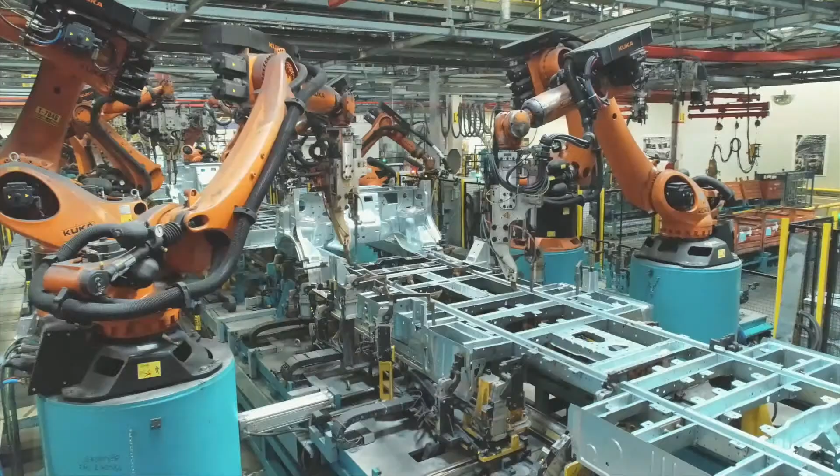I was the first director of the MSc in Sustainable Energy Futures. Energy at the time was very important. It was already obvious that we needed to work on sustainability, and it was clear that one of the missing links were people capable of viewing energy as a system and understanding enough of the links between the various components to be effective.

There was no training, there was no program available, so we decided, well, let's do it our own. Let's do something which is highly distinctive, a bit imaginative, and will put us at the forefront of the field. There was then very strong support by the college in enabling us to do an experiment, essentially, which required completely different organization, and so they said, okay, let's try it because it's worthwhile. We have very strong support, and I will be forever grateful for letting us try to poke the system and do something highly innovative.

Sustainable Energy Futures is a master's program which really empowers students to learn skills in energy and deploy those skills. The MSc is a great course because it brings together people from all around the world who are passionate about solving today's energy problems. We are going through a once-in-a-lifetime transition towards renewable energy, zero carbon systems, and this is a very complex issue requiring multidisciplinary knowledge.

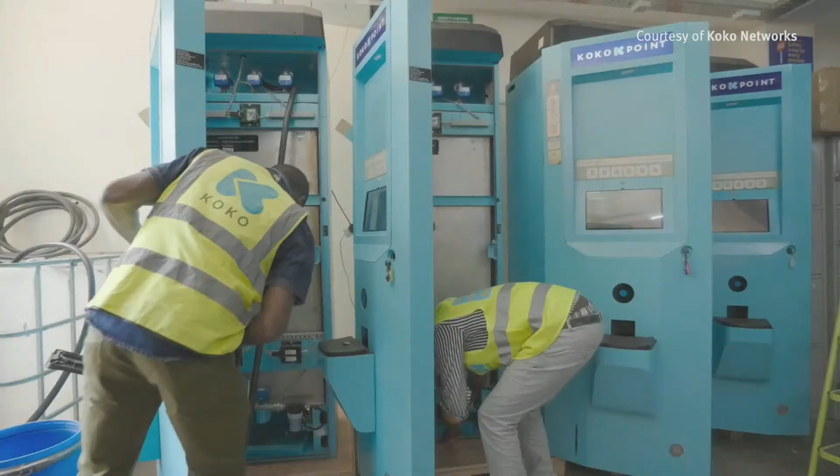So I co-founded a company called Koko Networks 8 years ago, which is mainstreaming ethanol as a cooking solution and household energy solution in homes in sub-Saharan Africa. The Sustainable Energy Futures Masters was extremely helpful in evaluating and making that choice, from the perspective of really understanding where the biggest areas of impact would be. So still in energy, as you can see, and I think SEF definitely helped me to get there.

First, let's face it, it's a well-known degree, and so that's very useful to get a job in energy somewhere else, like I did. I worked in Canada, the UK, France, and the US, and it was very helpful.

The 4 years that I spent directing the Energy Futures Masters were without doubt the 4 most rewarding years of the 18 years that I spent at the college.

The reason for that was quite simply the fantastic group of students that I got to work with during that time. What really stands out for me about the course is just how it brings out the best in everyone. The students come there because they have a mission in life, they really want to make an impact.

The staff really like teaching the material because they deeply care about the subject. We've done this for 15 years now, hopefully another 15 years at least. There's a lot left to do in energy system decarbonisation.

We started out by looking at low carbon electricity systems. The debate has clearly moved on. It's about decarbonising across industry and transport and buildings. That's upped the challenge in all of the technology areas that we educate in, and means this course is still vitally important. I think we're very proud, and I'm very proud to have been associated with this programme. I think it's been a really important programme. I think it will go from strength to strength.

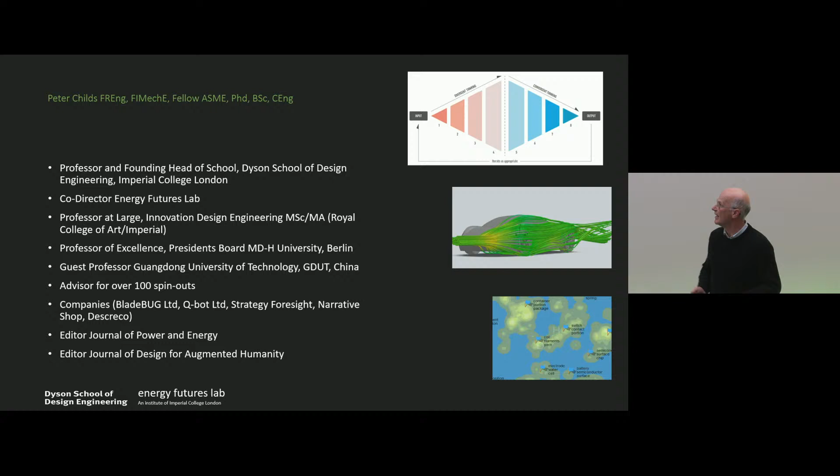So the Energy Futures Lab, we recognise that at Imperial, silos are good for getting those in-depth skills. Ladies and gentlemen at the back, we have 30 seats right at the front, and I really don't mind if you walk down and come join us at the front, so please do if you wish.

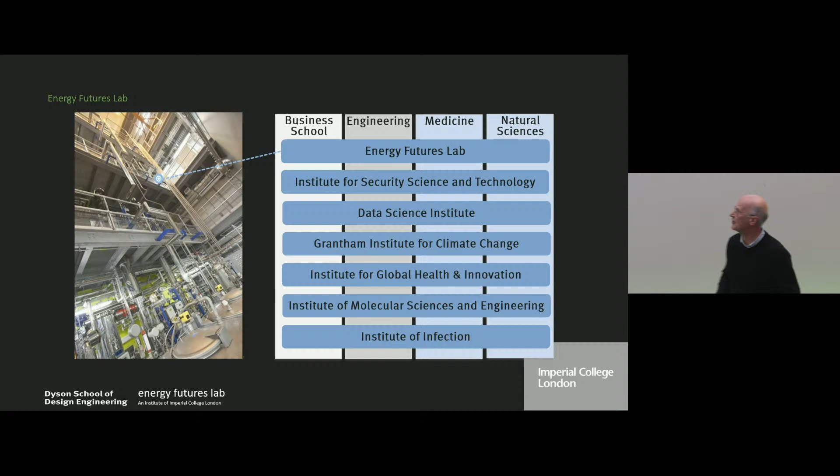What are we looking at in the Energy Futures Lab? Well, it is extremely broad, from materials to policy to power generating units to the materials we use.

I love the focus on materials here at Imperial because it's so easy to come up with concepts, and I've been party to this. We developed technology for chemical looping combustion, but it's only when one of my colleagues did the calculation on how much nickel was required for the pipework that we realised there wasn't enough nickel in the Earth's crust to do the technologies that we were proposing. So a very sensible approach to materials is vital.

Which of the chemical engineers in the room don't use iridium in their catalytic approach for something? And you know, there are finite quantities of some of these key materials. So we need to be wise and cautious in this.

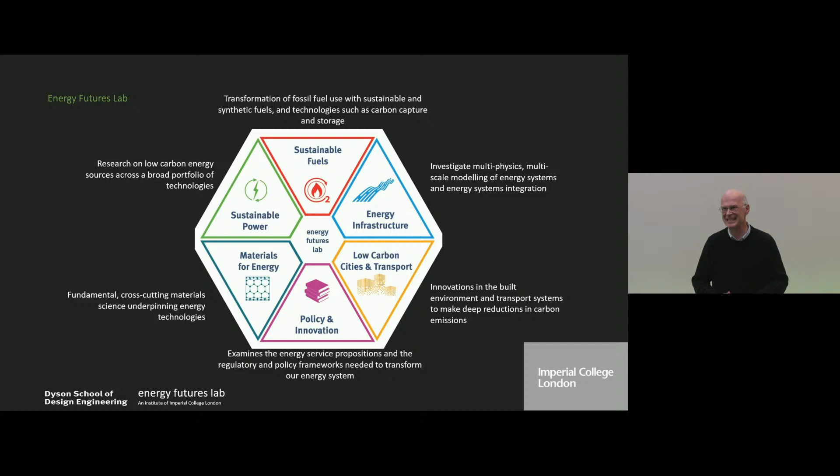So you can see the breadth of activities, and indeed the Energy Futures Lab represents about 600 researchers here at Imperial. And then, of course, we collaborate around the world as well. So it is a great delight to be involved in this activity.

So, technologies. I said I would give you a go. I don't know whether you're all used to menti.com, but you can see people grabbing for their phones. If you have a smartphone, go to menti.com, and you'll be asked for a code, which is 8650491. Whether you're in the room or seeing this on live stream, go to that link, and we would like you to answer this question: what technology do you regard as relevant to the UK energy context for a sustainable future?

If you're uncomfortable about it being UK limited, go wider. Really don't mind, so just enter whatever comes to your mind or you think is sensible. Nobody's saying it's not working. This is positive so far.

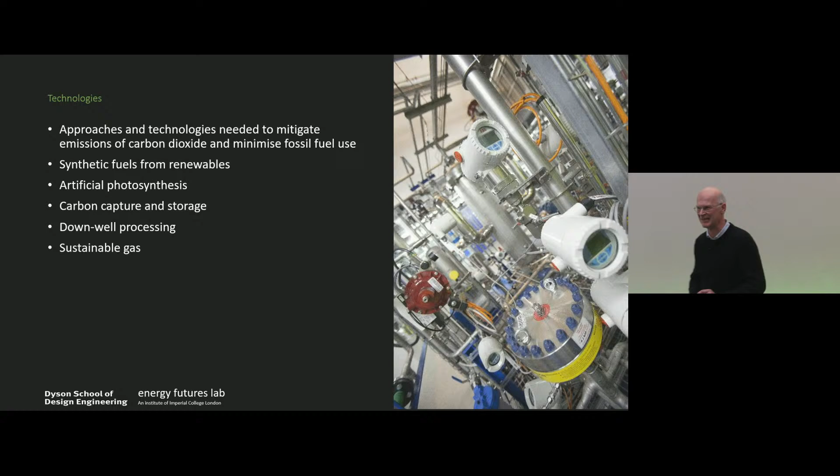You will see topics here which are not always comfortable to be debated. Downwell processing, sustainable gas. Say in the UK, should we turn our gas supplies off tomorrow? 11 million homes and buildings would not be able to have heating. So we need sensible approaches in order to go forward. And I look forward to questions about that statement, perhaps in 20 minutes or so.

I've already telegraphed that I'm engaged with wind power, and there are alternatives to use of petrochemicals. My ready solution is I'd love us to build 70,000 additional wind turbines around the coast of the United Kingdom. I'm being blocked. I've been trying to push forward 5 new wind farms, maybe 15 new wind farms in the English Channel. We only have one.

There are all sorts of politicians who run away from me when I get near them because they say they want sustainable power, but when it comes to one near their constituency, perhaps their view is a bit different. 70,000 wind turbines, we could actually do this. It is not implausible. It would create some challenges.

Tim will be wincing. How are we going to cope with that when it's not windy for 2 months of the year? August, nightmare for wind because it's a bit of a quiet, non-windy month. And we have had periods of 6 weeks in Europe where there has been very little wind. So you need additional technologies. Bring them on.

And perhaps if you're not going to go wind and nuclear, perhaps you're going to go wind and stored hydrogen. So there are options ahead of us.

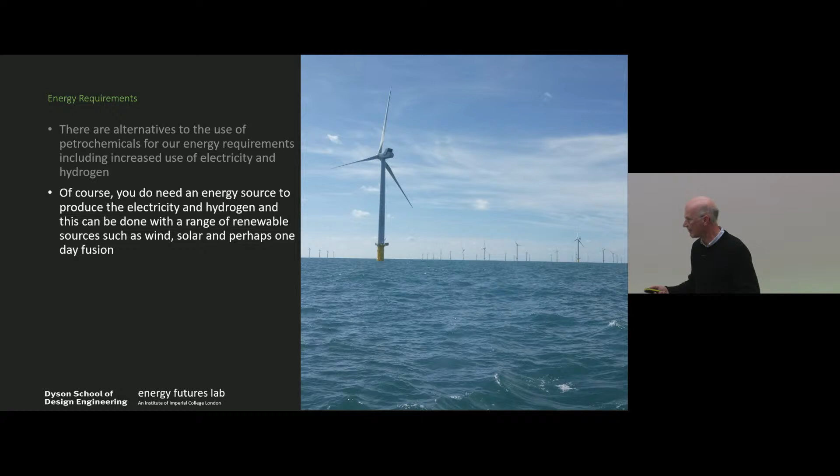But this technology is great. We have shallow waters around the UK, so building offshore wind turbines is comparatively easy in comparison to other countries. That's one of the reasons why we've gone ahead. But there are consequences. There's a lot of work on wind. You can't just innocently put up wind turbines.

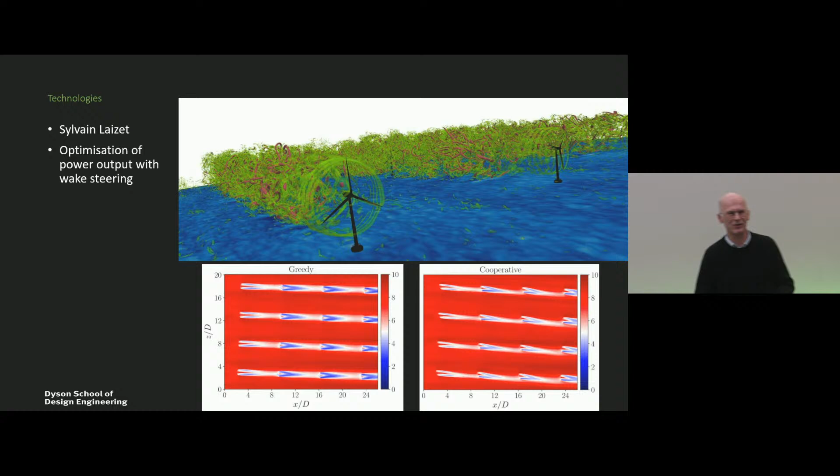And Sylvain Laizet's work on wind turbine placement, optimizing their positions so that you get the most in-changeable conditions - it's vital work, and you can get that extra few percent out of your wind farm. And you'll see why that's important in a moment.

Putting up a wind turbine, we've been doing this for a long time. And quite a lot of people in operations and maintenance will say, well, the designers did great jobs on designing efficient equipment, but no consideration was put into how they're going to keep that equipment going, how they're going to maintain it and repair it, and give it lifespans of tens of years.

We have a lot of remote service vessel technology. This is just cool kit. If you're into your gadgets, this is just wonderful stuff. But this is the enabling technology we need in order to install this equipment and then keep it running, and keep it running at scale.

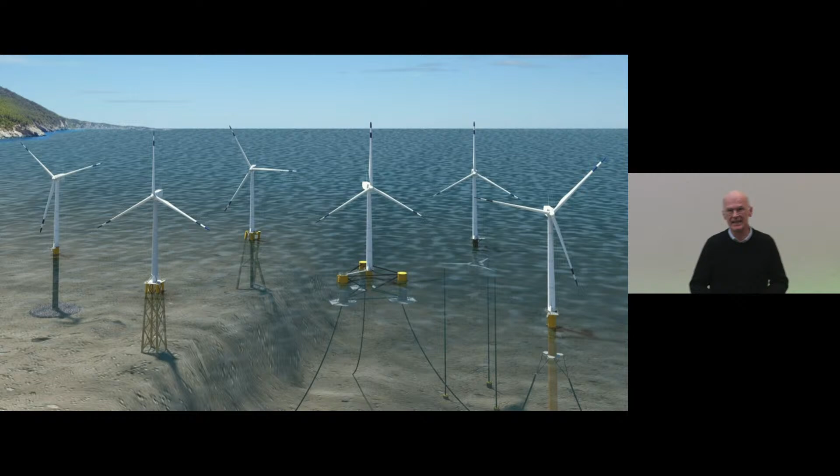Whilst places like the North Sea may just be 20 to 60 meters deep, and it's quite convenient to install wind turbines, that type of water is quite rare around the world. So people are looking at floating offshore wind, and perhaps tethering wind turbines on all sorts of different platforms. I'm sure we will see a lot more of this.

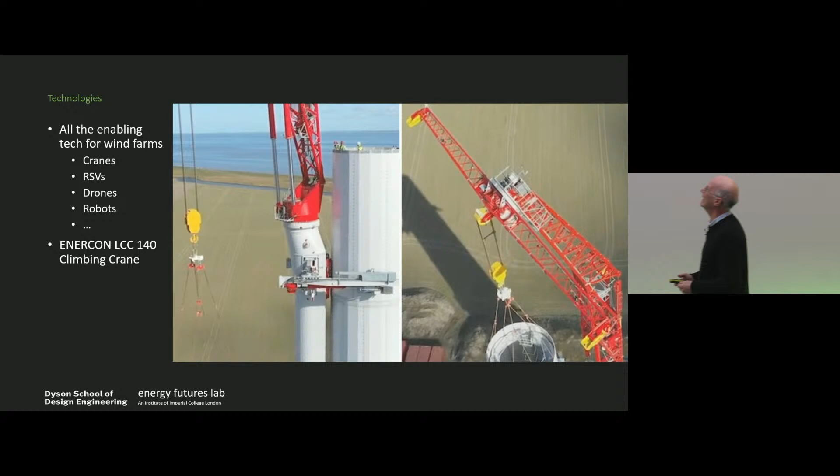But I want to talk about more enabling technologies. You'll see a solution for putting up wind turbines in a moment. But I just love this news story that came out a few weeks ago of using the tower itself as part of the crane. Essentially, the crane mechanism crawls up the tower as it produces it. Really smart technology from Enercon.

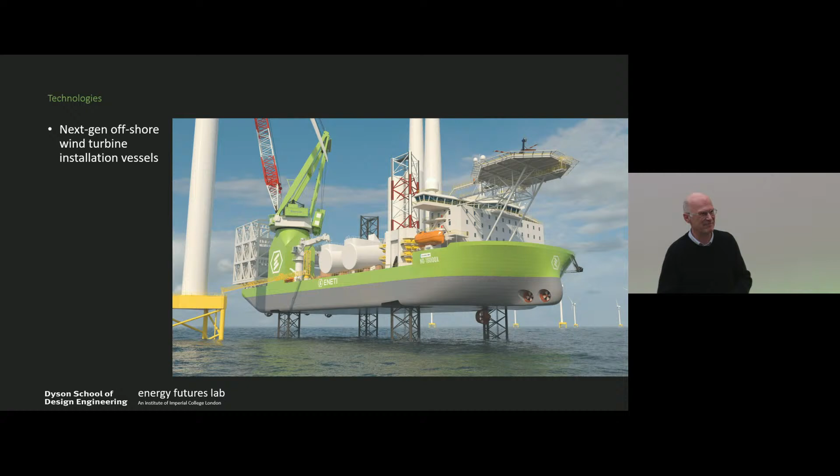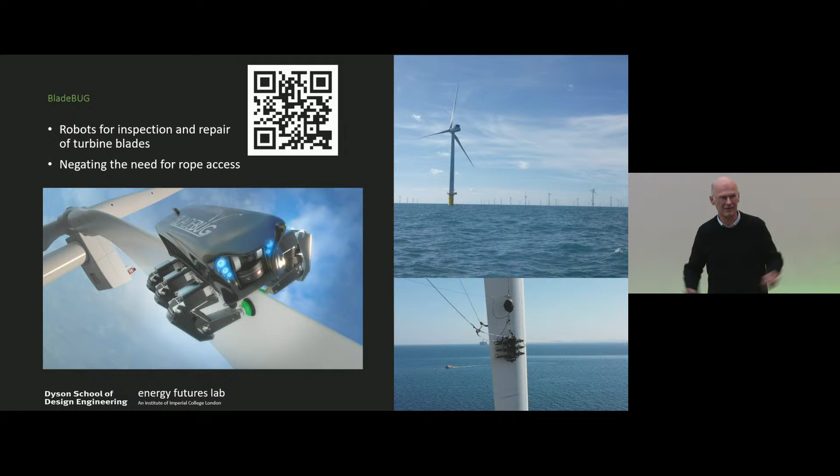Deliberately so, because it's really a tool bay, so that you can install any sensor you might want, any repair equipment, any tool, if you wish. So do go and chat to the BladeBUG team afterwards - a little bit more about it. The wind turbines, they are not just flat surfaces - it's a concave and convex surface. And so we've had to develop a very sophisticated robot in order to articulate over that surface.

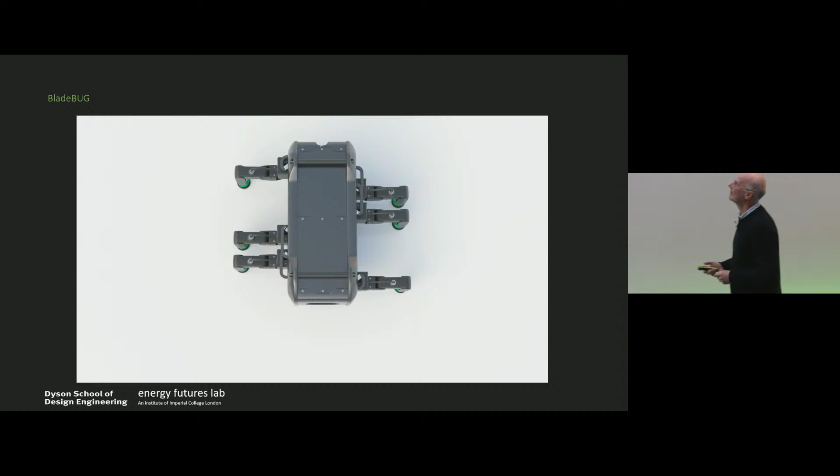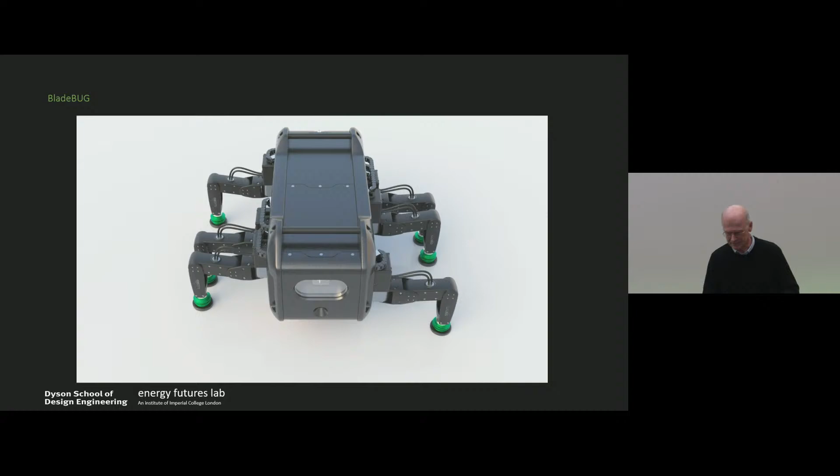Anyway, slow-moving video, but you'll get the idea. We have several of these robots at the moment. The company's scaling, and 2024 looks rather busy for us because we'll probably have to do 15 or 20 robots. It's just exciting times.

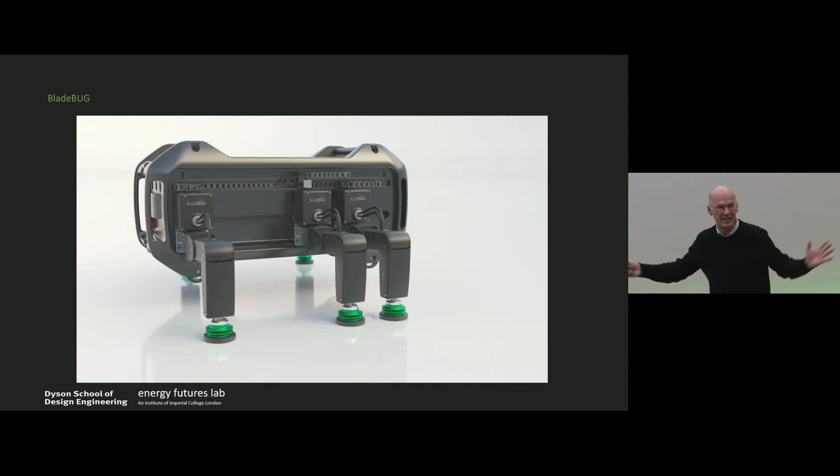Sustainable Energy Futures, the Masters program, have been engaged in this, doing student projects there. If this is your bag, come and chat to us.

And what is it actually doing? Well, we're using ultrasonic technology to scan the fiber composite surface in order to examine the integrity. So the drone may say, oh, looks like there's a dodgy patch halfway down the blade.

We love drones in BladeBUG because they just drive business our direction. The company will then schedule a day to stop the turbine, deploy the robot, and do a detailed inspection to identify whether there really is a problem. And if there is, then perhaps we can implement a repair as well.

I've mentioned a passion around both energy supply and energy demand management. There's so much we can do with perhaps tempering our use of energy. And there are many companies involved in that.

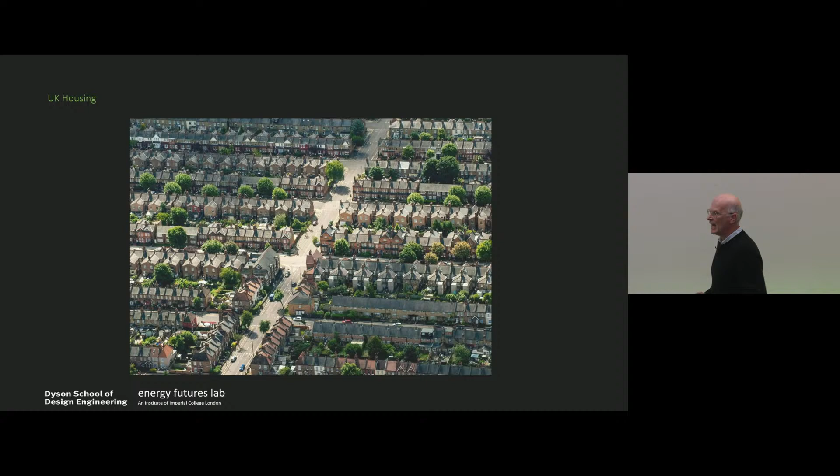One of the other companies I'm principally involved with is Q-Bot. We have 6 million of these lovely terraced homes in the UK. They are lovely. They actually can be very desirable.

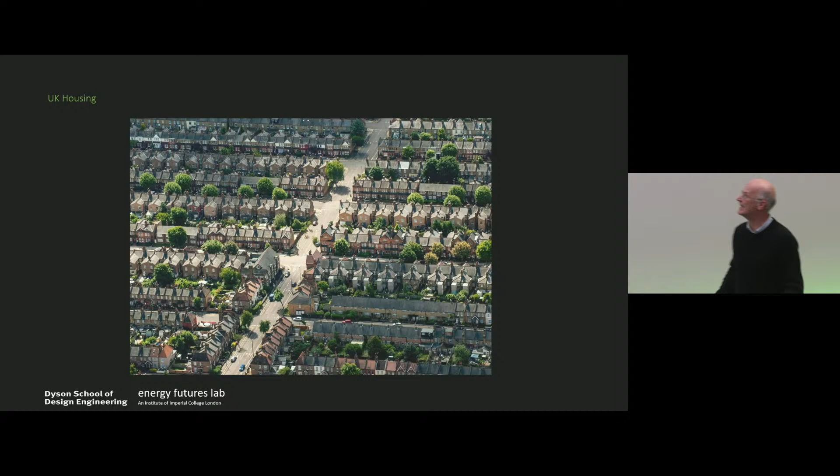The ground gets wet, dries out with seasons, and also we build on slopes. Having an elevated home off the floor allows you to cope with gradients and with movement of the ground. So very sensible technology, architecture and engineering, if you wish.

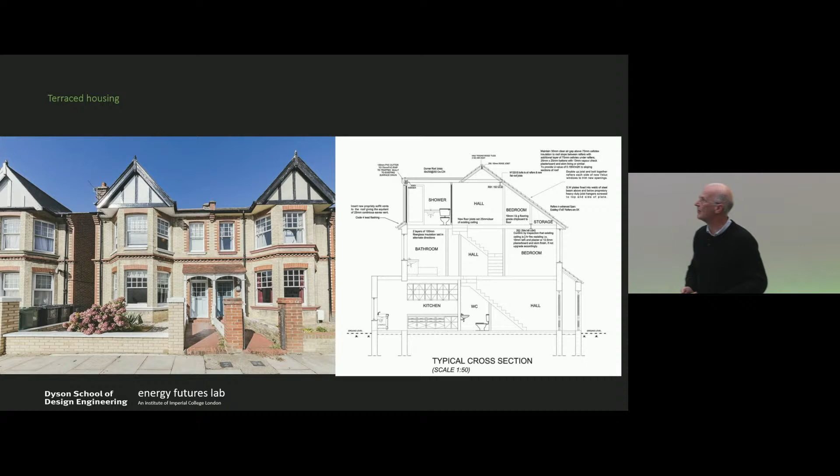But it gives you this cavity on the ground floor. And what we've been doing with the Q-Bot company is developing technologies to spray thermal insulation materials on the underside of your wooden floorboards. And this gives you a 15% to 20% improvement in the heat efficiency of your homes.

The company has done several thousand homes so far. And if you want to turn that into a carbon saving, it's of the order of 15 to 20,000 tonnes so far. But because this accumulates, it should be 100,000 tonnes or so by the end of next year.

And again, you'll see the Q-Bot technologies outside. Quite a robust robot. It needs to be for doing this type of work.

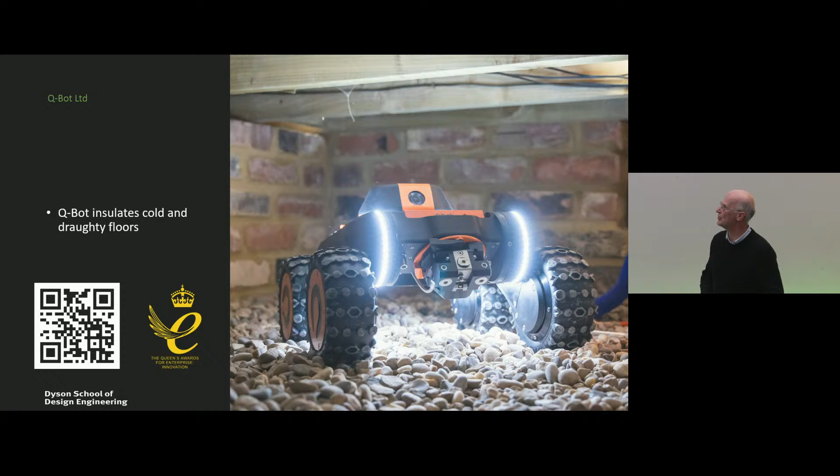So I have my next question for you. Audience participation time, another Menti.com. You know I'm going to show you your answers, so maybe a bit more of an encouragement to have a go. The code, so go to Menti.com and the code is 8650491. And the question is, what does an ideal energy mix or energy solution for the UK look like?

And if Peter Childs puts in all wind turbines, I suspect the MSc students in the room might give me 3 out of 10 or 2 out of 10.

Now we are in a room with experts, or many experts. We are in a room with consumers. We are in a room with members of society. So all of us have the right to input into questions like this. You know, this is a community.

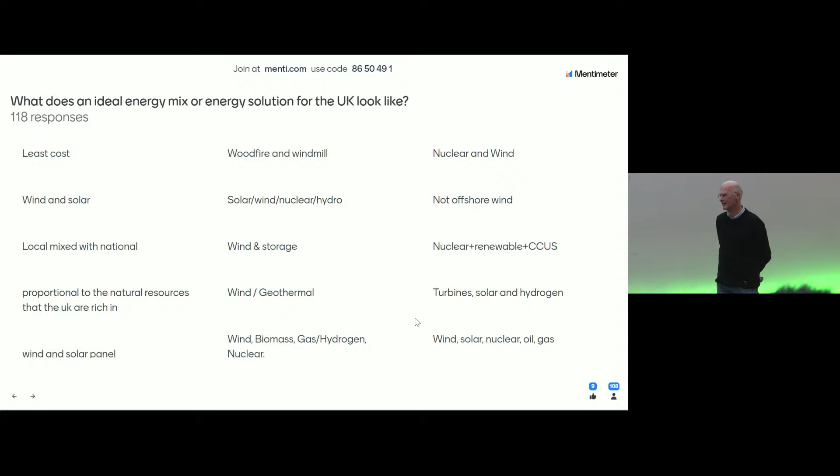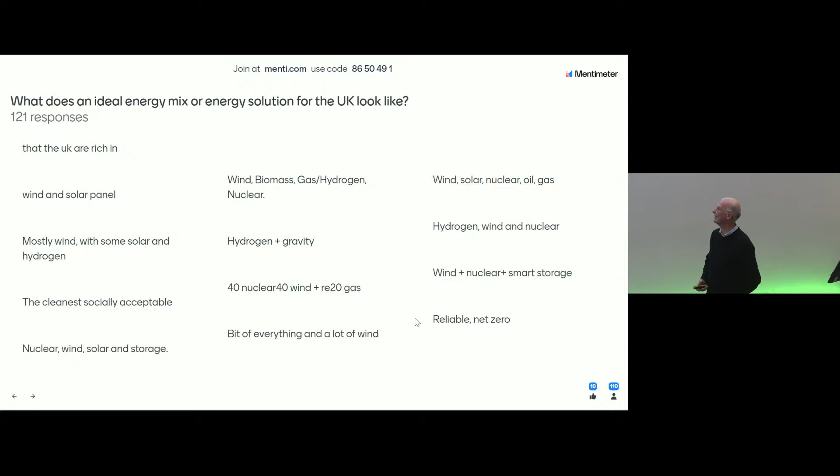Wind, biomass, gas, hydrogen, nuclear. So some of you are really going for a mix. Interesting. Hydrogen and gravity. Love it. Reliable net zero. A bit of everything. Oh, prosumers.

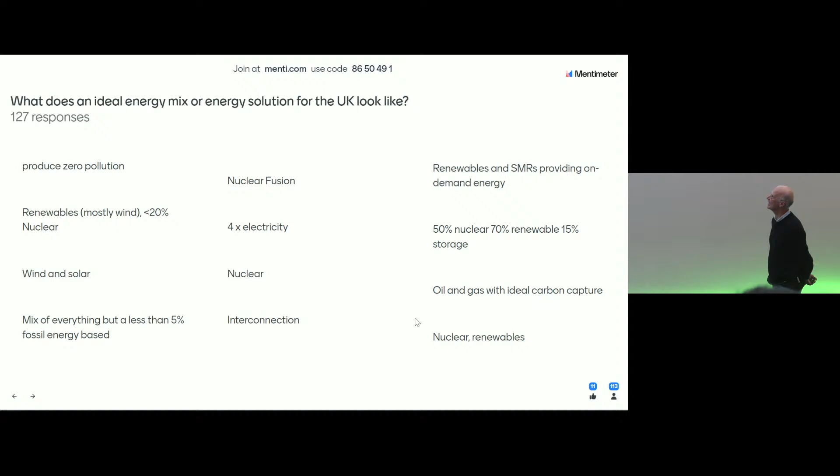Perhaps people are laughing. Is it the 100% coal that people are laughing at? I remember going through my education and being told that we easily have 1,000 years of coal available just in this country alone, should we choose to use it. But perhaps we need some really good technologies out of chemical engineering to get to exploit that. Okay, thank you very much, ladies and gentlemen. Really good to see that.

All right, so an energy mix. How are we going to plan this? Who decides? Should it be competitive? CFD - experts in the room, the mechanical engineers might say computational fluid dynamics. The bioscientists might say citrus fruit disease. The energy experts, it's contracts for difference.

And I mentioned the challenge the UK has had over the last 18 months, making a huge mistake in terms of bid prices in these contracts and tendering. So most commentators just go, we got it wrong in trying to persuade energy companies to supply wind at scale to us, but at too cheap a price. Cheap might sound good for the consumer, but it still needs to be viable. It needs to be viable for all concerned.

I've put down the provocation here. Should we take a regional, national, or international approach? I'm going to see if I can persuade you of the international approach in a moment. And then just some of the things which you will see that groups around Imperial and other universities are looking at: whole system models, using smart grids, system integration, energy storage at scale.

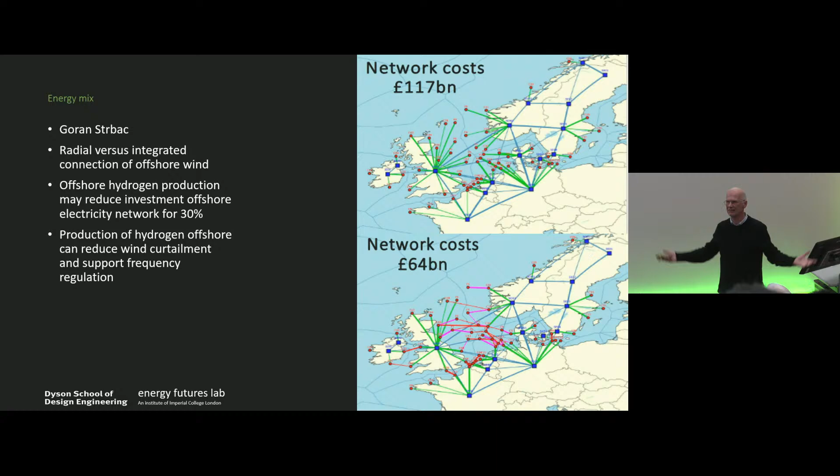So I just love this work in terms of what it might mean for a sort of radial versus an integrated approach to supplying chunks of Europe with renewable energy.

Okay, getting towards the fast bit of my talk. I think you may get the impression that I'm suggesting change is coming. Well, I don't need to suggest that to you. All of you know that. You will have all lived through substantive changes within your own lives. Let's just talk about the weather for a moment. What's happening? Are we going to get warmer? Perhaps.

I've written a very long book on rotating flow. I know one of the people in the audience has this.

If we didn't have them, then the equator would get very uncomfortable very quickly. A typical large-scale cyclone, a hurricane, moves vast quantities of energy, the equivalent to 146,000 nuclear bombs of energy poleward. So these large-scale cyclones are vital in our atmospheric mixing, moving energy at scale. So they serve a purpose.

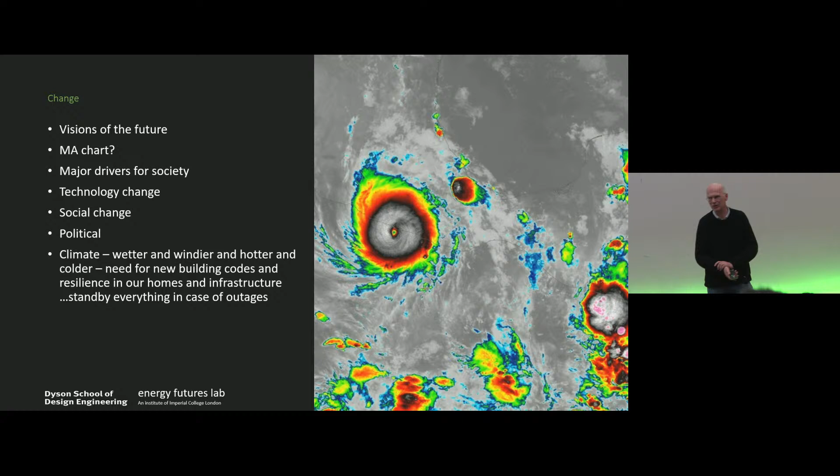Change is coming. Our planet's atmosphere seems to be getting warmer. There are consequences that we just can't ignore. And so building codes is an example where we shouldn't just build with air conditioning and good heating. We've got to build for even more robustness and resilience.

So I've alluded to roadmaps. These are standard in just about every theory of change and every grouping looking at the future. The tech foresighting people, the societal planning people, governments, local governments. You look at where you are now, your enablers - well, we know where we are now. You have your ideality. Some of you put your ideality in the response to the Menti survey. And then the distance between those is immense.